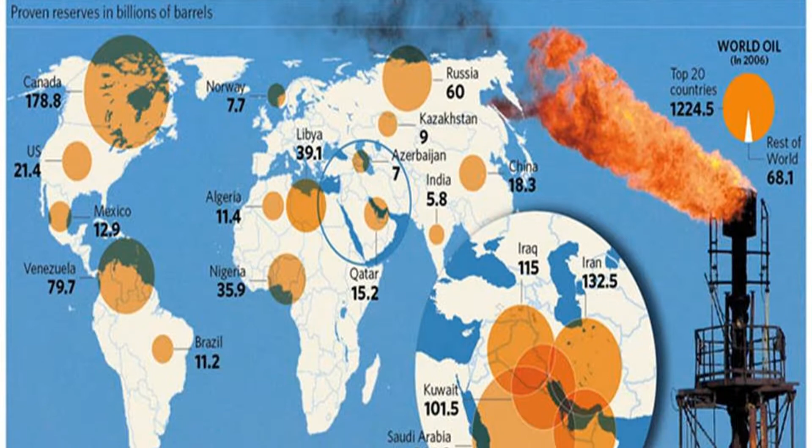And also, you can see here are the oil reserves around the globe. If you see where Cuba is, there's actually none around Cuba. So all the oil that is used in Cuba has to be imported from a different nation. So even though currently they don't have to pay for it because Venezuela is supplying it, you don't know what the future holds. And there's also a lot of carbon dioxide that's emitted from the transportation, and especially from its combustion.

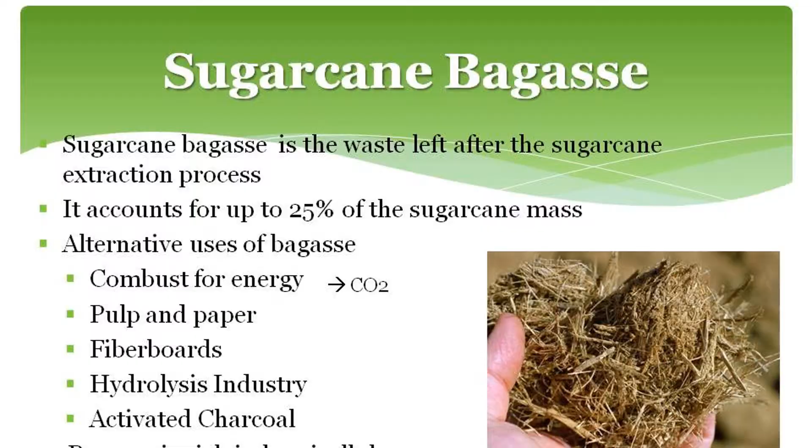As we all know now, Cuba's infrastructure is deteriorating and it needs significant upgrades. They need to break dependency from foreign nations, as well as come up with a reliable source of energy, and what better reliable source of energy than an available source of energy, such as sugarcane bagasse. So bagasse is the actual waste from the sugarcane production. It accounts for up to 25% of the whole sugarcane mass.

There are alternative uses for the bagasse. Mainly they combust it to supply energy at the refineries. The problem that we have from that is that there's carbon dioxide from its emission. They also use it in the hydrolysis industry and in activated charcoal.

One thing to note is that bagasse is very rich in hemicellulose, and that's very important for biological purposes. If you want to extract hydrogen from the bagasse, that's very good because it makes it a really good substrate for bacteria. And when you burn the bagasse at the refineries, the energy content from its combustion is 7.3 megajoules, and as I had mentioned earlier, hydrogen has 120.

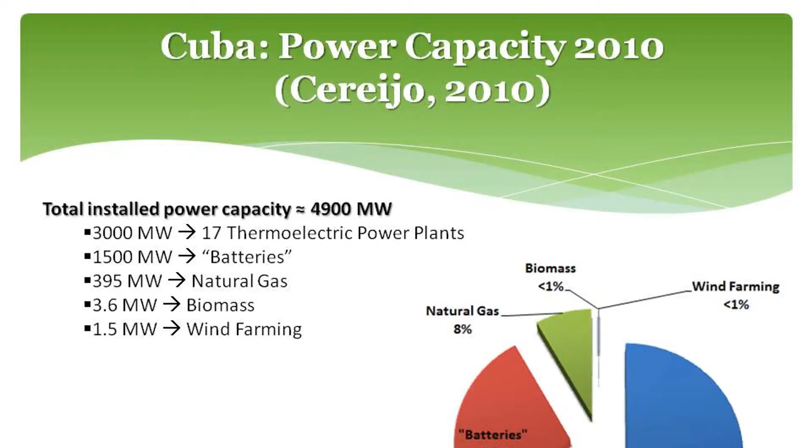As of 2010, thanks to Dr. Cereijo, sorry about the pronunciation, Cuba's total installed power capacity is currently 4,900 megawatts. Besides the inefficiencies, the majority comes from thermoelectric plants, and 31% comes from small generators, also known as batteries. 8% comes from natural gas, and a fraction of a percent comes from both biomass and wind farming. Of all this, 30 to 35% is lost due to its deteriorating infrastructure.

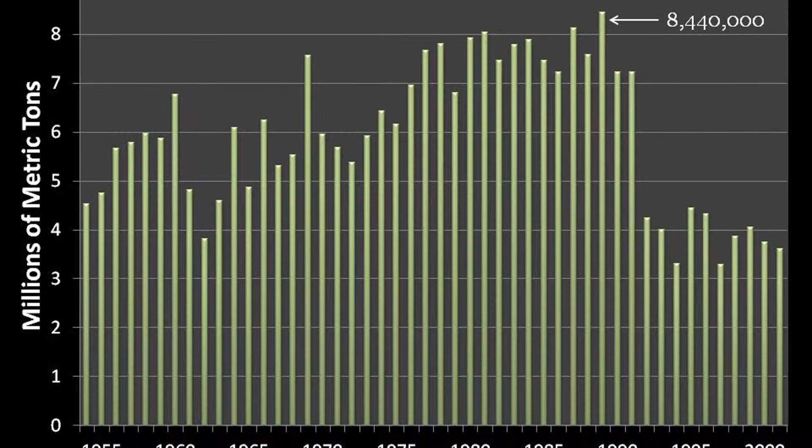Here are the sugar production trends from 1955 to 2002. I'll come back to this later. I just want to emphasize the maximum that happened in 1990. There were about 8.4 million metric tons of sugarcane produced. And I'll get back to that later.

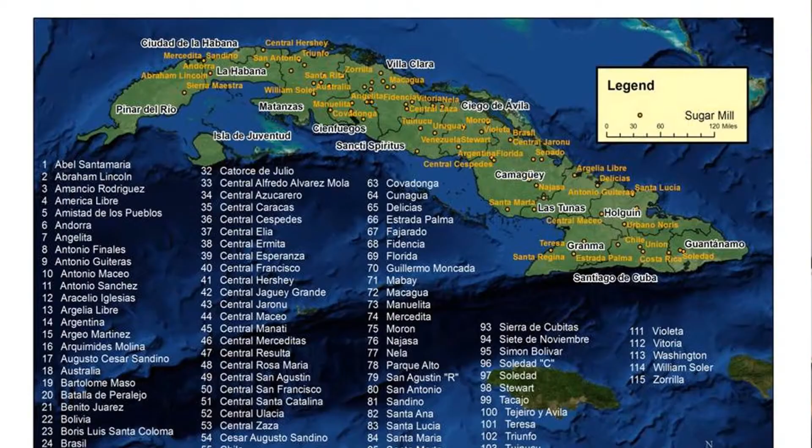Here is a GIS map that we developed of the sugarcane mills in the past decade. Currently only 26 remain. However, I would like to emphasize the uniform distribution throughout the island, and how transportation of energy from the sugarcane mills would be a lot more efficient.

So due to the need for a clean source of energy that utilizes the available resources in Cuba, we have looked at 3 different methods of producing hydrogen: biophotolysis, microbial fermentation, and bioelectrochemical systems.

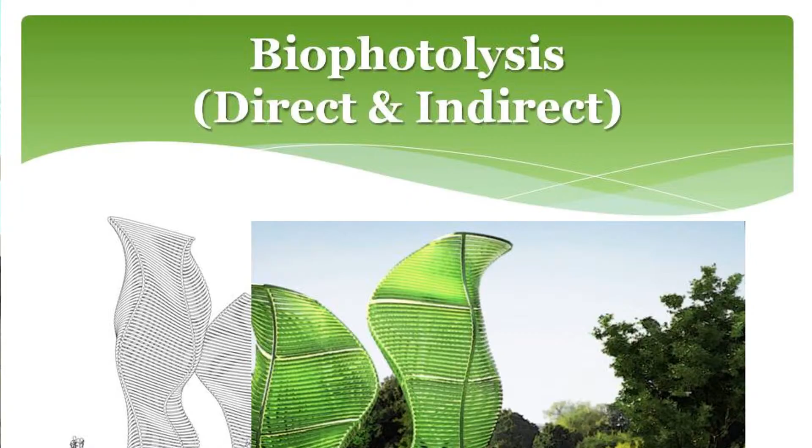The first one is biophotolysis, bio meaning life, photolysis, the splitting of molecules via bombardment of photons. It was first discovered in 1939, but it wasn't fully understood until the late 1990s. Here's a cool picture of a photobioreactor, and it's purely for aesthetic purposes. However, it is pretty cool to look at.

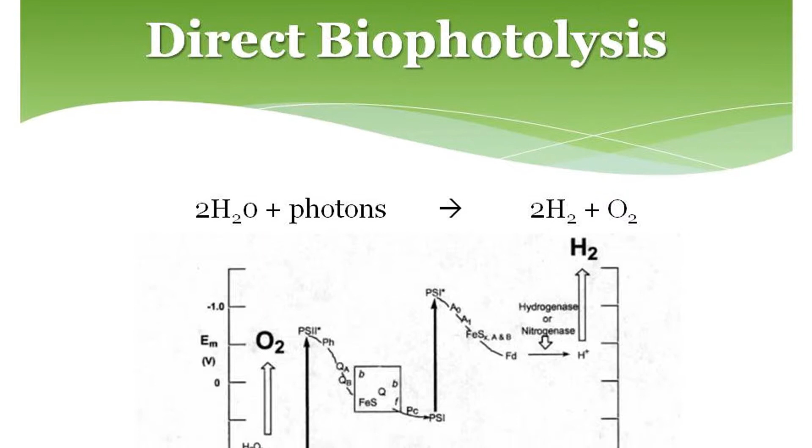The first type of biophotolysis is direct biophotolysis. Certain algae and bacteria contain certain enzymes that, if reduced, have the ability of producing hydrogen. The problem with direct biophotolysis is hydrogen and oxygen get produced simultaneously, making it less efficient at producing hydrogen. The solution to that is indirect biophotolysis.

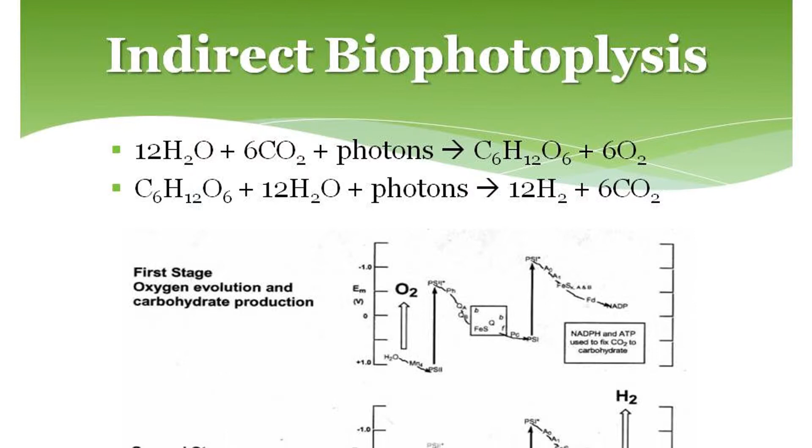Basically, they separate this indirect biophotolysis into just 2 steps. First, they produce carbohydrates, and in the first stage, they release the oxygen. And then in the second stage, they decompose the carbohydrates, and they produce hydrogen separately, producing up to 5 times more hydrogen than in direct biophotolysis.

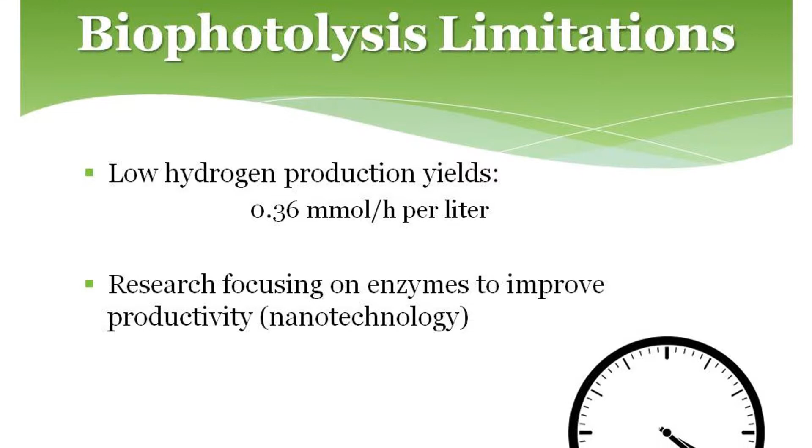The problem with biophotolysis is currently in research laboratories, only 0.36 millimoles an hour per liter of reactor have been achieved. But with nanotechnology and new innovations coming around, it's only a matter of time before this becomes utilized on a larger scale.

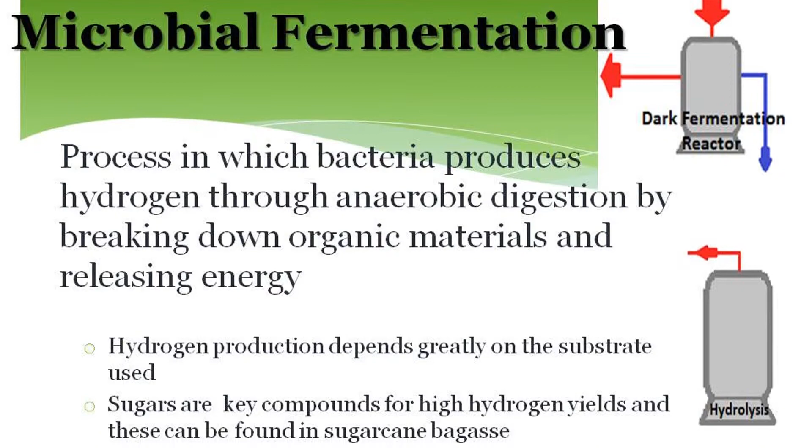Another method to extract hydrogen from waste, in this case the bagasse, is microbial fermentation. In microbial fermentation, you have the bacteria that would actually produce the hydrogen by breaking down the organic matter. The organic matter in microbial fermentation is called substrate. And as I mentioned earlier, bagasse is a really good substrate because it's so rich in hemicellulose and in sugars.

The fermentation that we looked at is actually dark fermentation because it's convenient as it occurs continuously in a reactor and it doesn't need the availability of light.

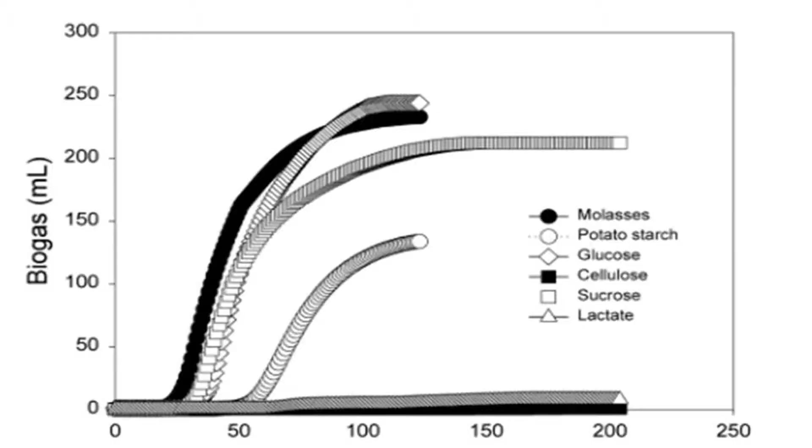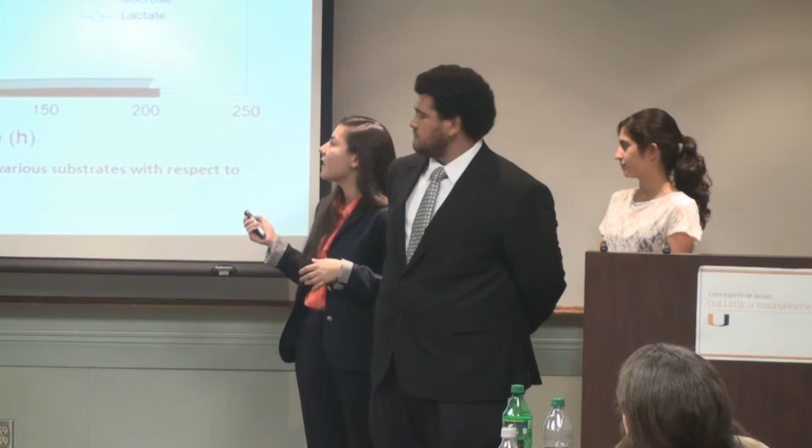Right here, it's actually different substrates that are used by bacteria to produce hydrogen. And at the very top, we have glucose, which is a component of the bagasse. And when you use glucose as a substrate for bacteria to ferment, you get the highest amount of hydrogen in the shortest amount of time. So it's very convenient to use.

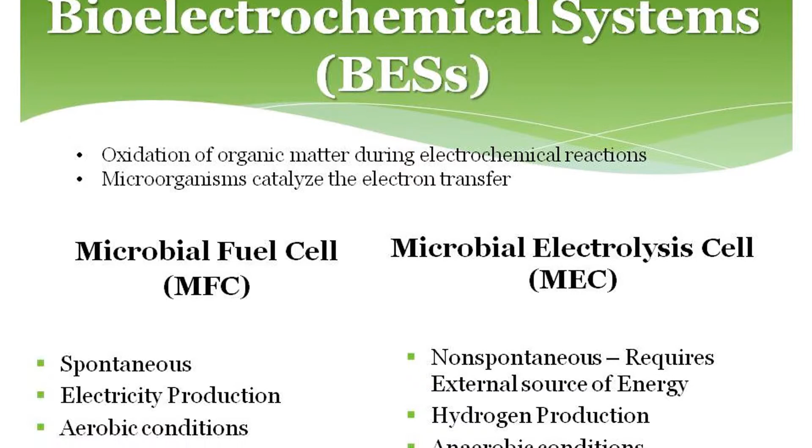Bioelectrochemical systems can be thought of as any electrochemical system where the bacteria serves as a catalyst for the oxidation of organic matter. There are 2 types of bioelectrochemical systems. There is the microbial fuel cell, where the reactions are spontaneous, so energy is produced spontaneously under aerobic conditions, and the microbial electrolysis cell, which derives from the microbial fuel cell.

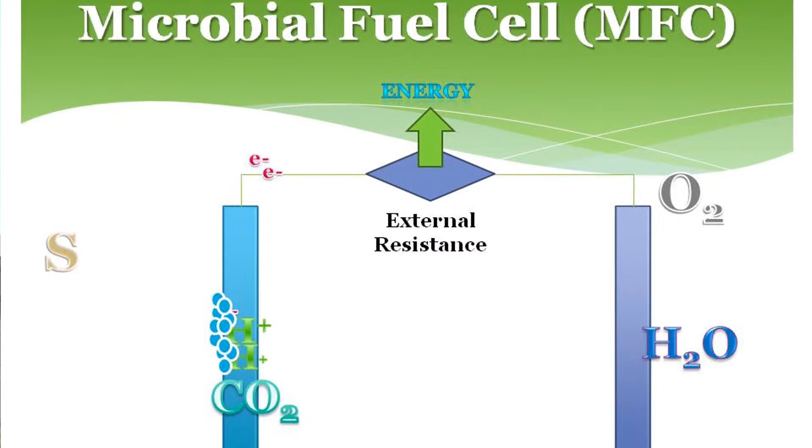In this case, the reactions are non-spontaneous, so they require an external source of energy, and hydrogen is produced rather than electricity, and it occurs under anaerobic conditions. This is an illustration of the reaction that occurs in the microbial fuel cell. First, the substrate is broken down by the bacteria into carbon dioxide, protons, and electrons.

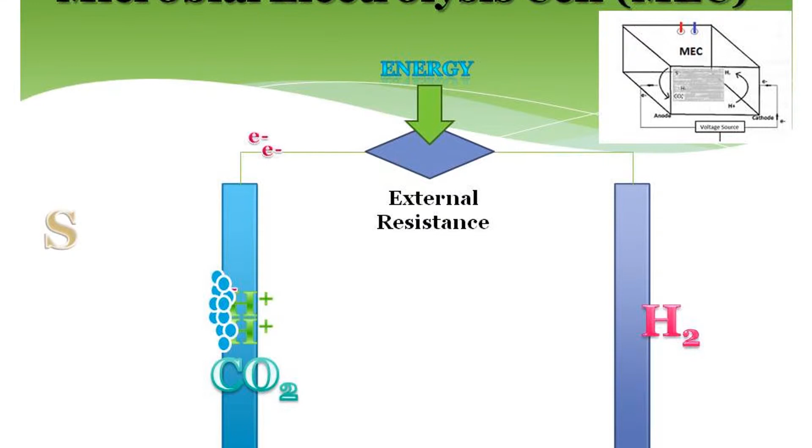Now, the microbial electrolysis cell, as I said, derives from the microbial fuel cell, so the reactions are similar. The substrate is broken down by the bacteria into carbon dioxide, protons, and electrons. The difference from the microbial fuel cell is that no oxygen is present at the cathode, so energy has to be supplied to the cell for the reactions to occur. And when energy is supplied, the protons and the electrons travel towards the cathode, react, and produce hydrogen.

There's been a lot of research that has studied the potential of using the MFC to power the MEC. Because as I already explained, the MFC produces electricity, so it has the potential to supply energy to the MEC, and then in this manner produce hydrogen without an external source of energy.

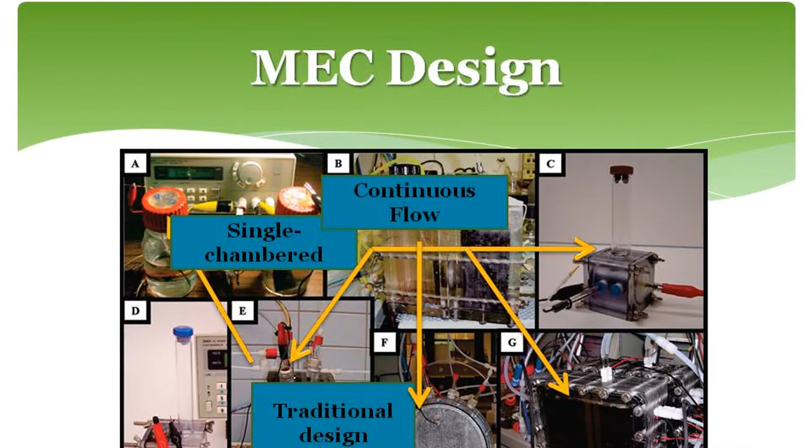These are different experimental microbial electrolysis cell designs. The first one is the traditional design that was used to just prove the concept behind the electrolysis process. It consists of two bottles connected by a tube and a cation exchange membrane that facilitates the movement of protons from the bioanode to the cathode.

These are continuous flow reactors that produce hydrogen continuously, so it doesn't accumulate. And this one is the single-chambered microbial electrolysis cell, which lacks a membrane, because there's been research that shows that there is energy loss involved in the membrane. So the absence of the membrane can produce more hydrogen.

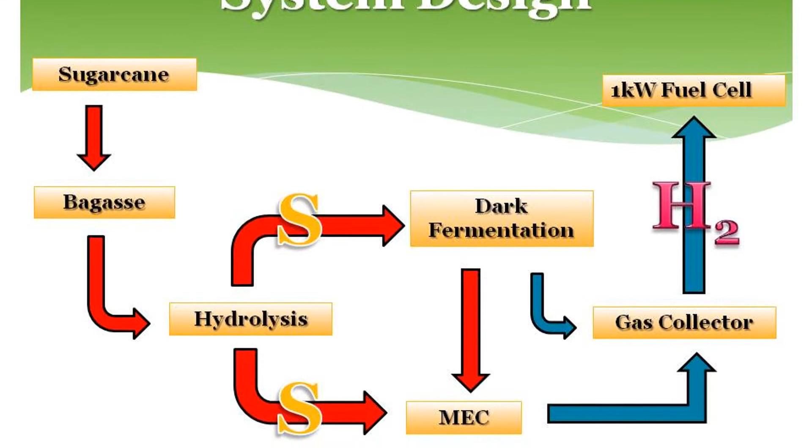So we've talked about three processes of producing biohydrogen: biophotolysis, which could use solar energy to produce hydrogen, and dark fermentation, and the microbial electrolysis cell that can use organic matter to produce hydrogen. Out of these three processes, dark fermentation proves to produce the highest yield of hydrogen. So we propose this integrated design that combines dark fermentation and the microbial electrolysis cell to even maximize hydrogen yield.

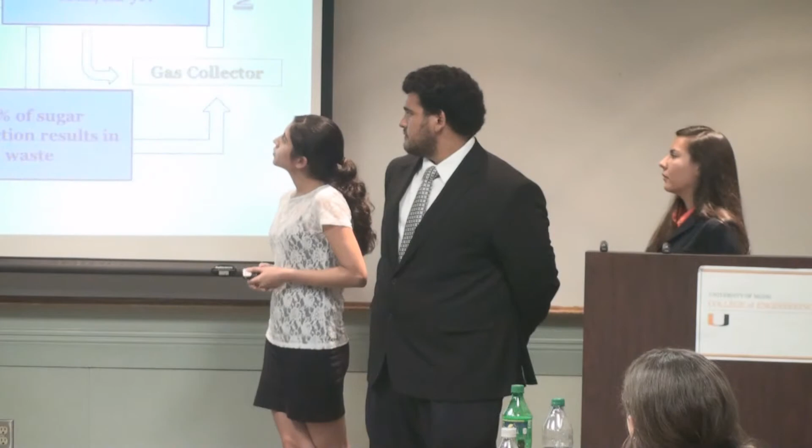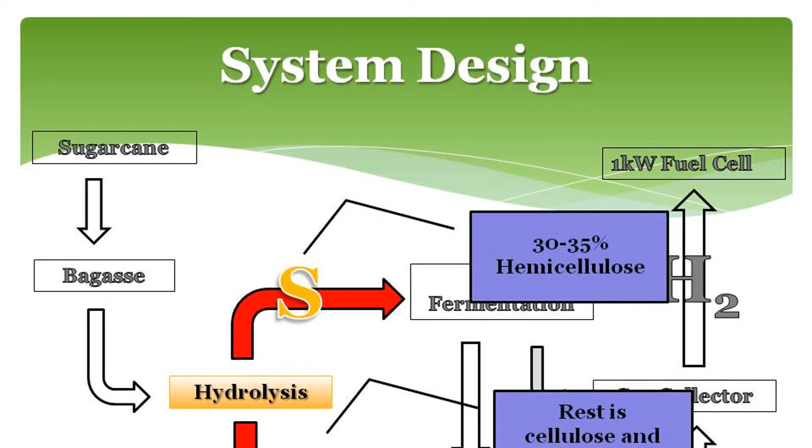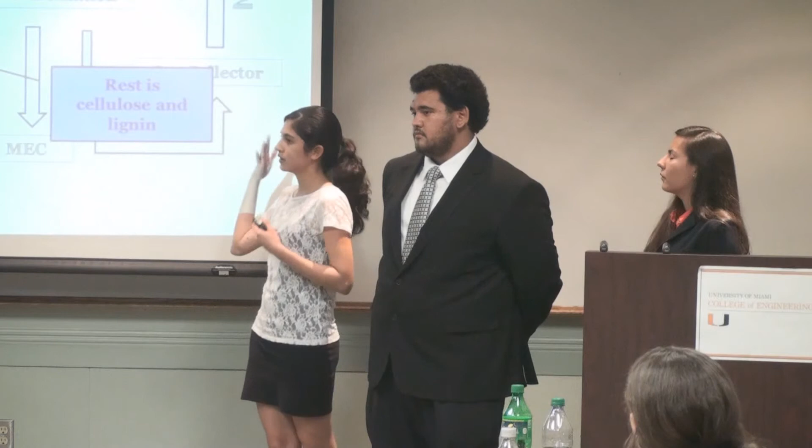So we assume that sugarcane production in Cuba is approximately 50 tons per hectare per year. 25% of this sugarcane production results in waste, which is the sugarcane bagasse. The sugarcane bagasse now undergoes hydrolysis, where it's going to be broken down into 30 to 35% hemicellulose, and the rest is cellulose and lignin. As Maggie went over the dark fermentation process, hemicellulose would go through the dark fermentation reactor, and the rest that is cellulose and lignin would go through the MEC.

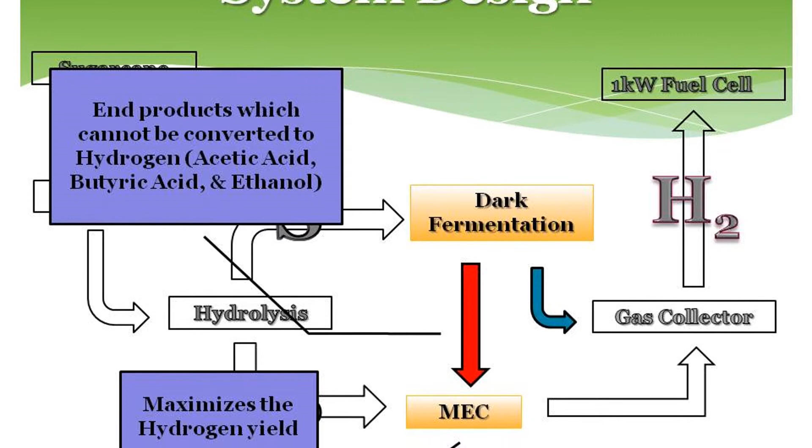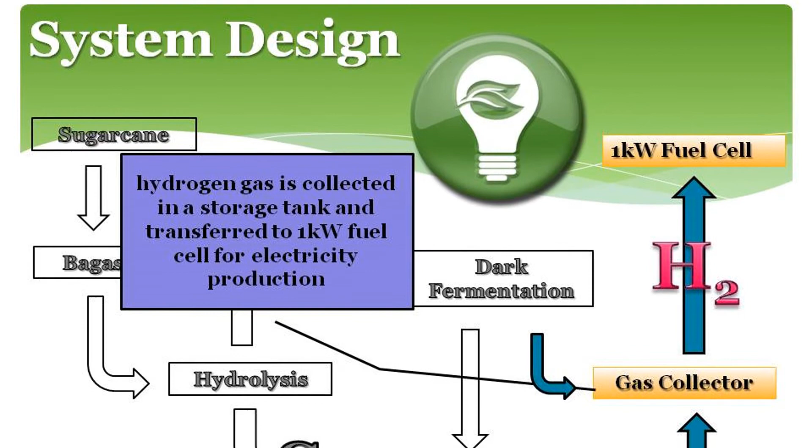And so during dark fermentation, there are byproducts that have the potential to produce even more hydrogen, but that can't be broken down by the bacteria. So the dark fermentation effluent would be transferred to the microbial electrolysis cell to even maximize the hydrogen yield. And the hydrogen produced from these two processes can be collected and transferred to a 1 kilowatt fuel cell for energy production.

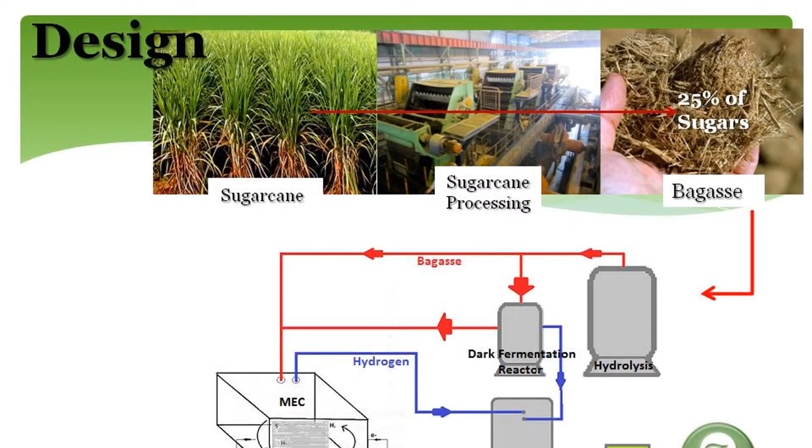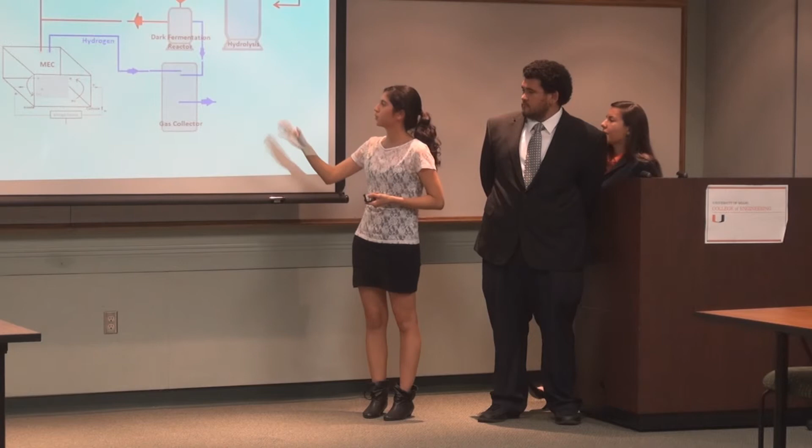And just to recap, 25% of the sugarcane production is sugarcane bagasse. In our design, it is broken down during the process of hydrolysis into hemicellulose and solid matter. The hemicellulose goes through the dark fermentation, solid matter would go through the MEC, and any remaining products in the dark fermentation process would also be transferred to the MEC to extract more hydrogen. And the hydrogen is collected from both reactors, transferred to a fuel cell, to produce electricity.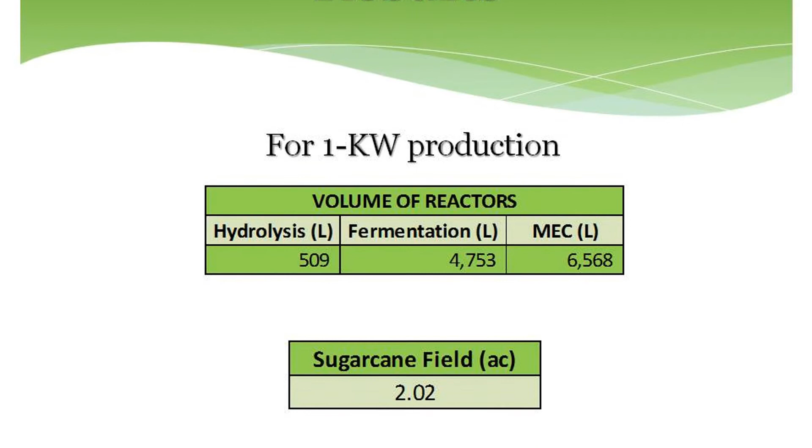And looking into literature, we've collected data to estimate the volume of the reactors that would be required in our design. For hydrolysis, it would be about 500 liters. For fermentation, about 4,700 liters, and for the microbial electrolysis cell, it would be about 6,500. And about 2 acres would be required for production of 1 kilowatt, which is slightly less than what a modest home would require, which is 1.3 kilowatts.

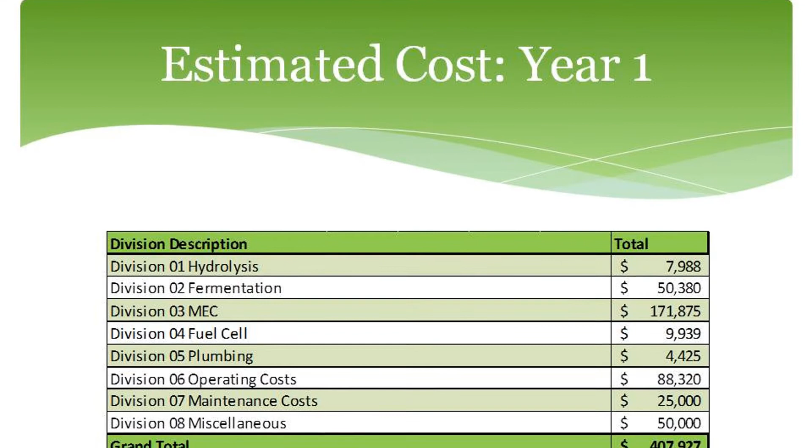Here's the cost analysis of our pilot design, including the MEC and the fermentation and the hydrolysis reactors, also including the maintenance and operational costs of one engineer and two technicians. So basically, it will cost about $400,000 for just 1 kilowatt. However, this is just to go further, because all these studies are done on a small scale. So we want to see on a larger scale what we can do, and if production rates are better, we can hopefully implement it on an even larger scale.

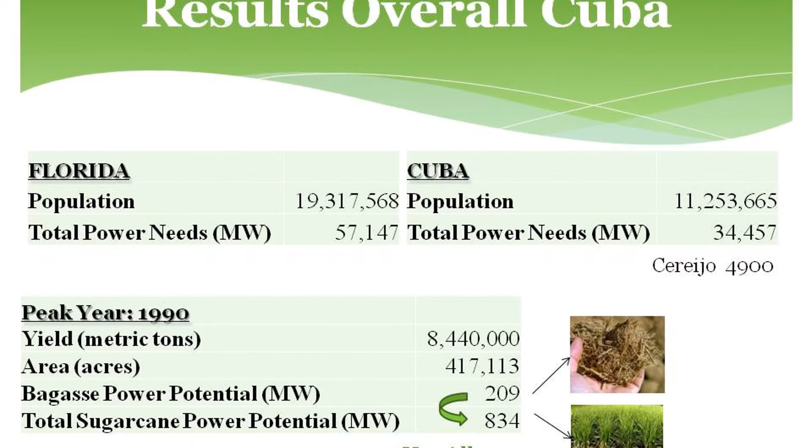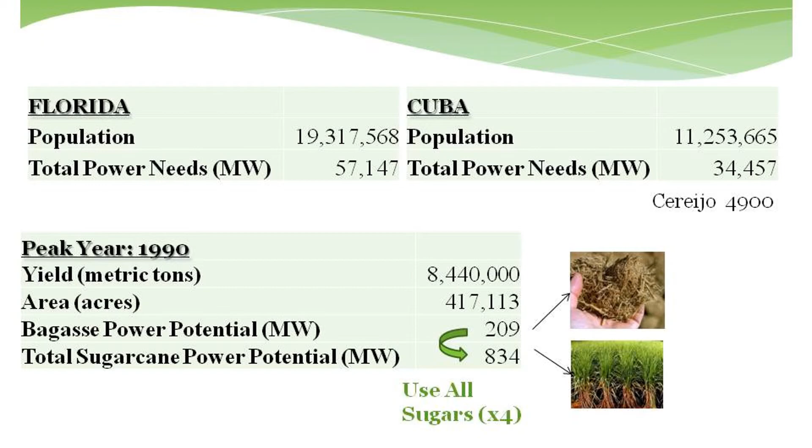So the overall results, I would like to just give everybody a perspective. I know Cuba's a developing country, Florida is part of a developed nation. But by relating Florida's population and total power needs to Cuba's population, we can see that Cuba is drastically under-powered from the 4,900, and in relation to Florida, it's about 35,000. So back to 1990 when they had their peak sugarcane production, and most recent peak sugarcane production.

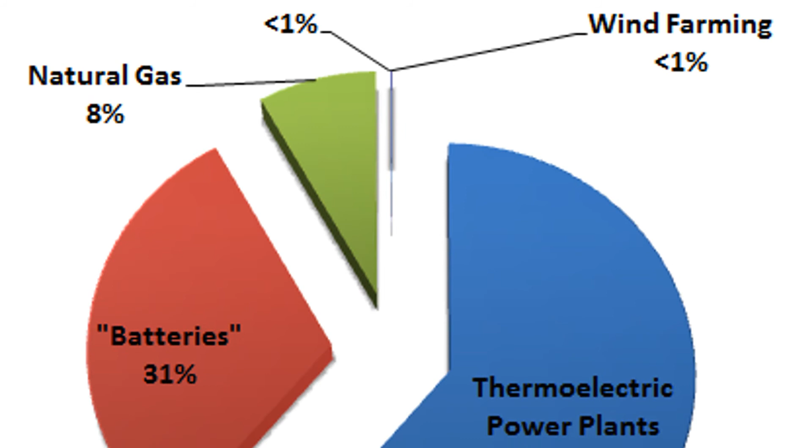If we were to use this technology to supply energy, and if we were just to use the bagasse alone, we could potentially give Cuba about 209 megawatts. And if we were to use all of the sugarcane, then we pretty much multiply by 4 and we can get about 834 megawatts of installed generating capacity. That would increase Cuba's power infrastructure by about 15%.

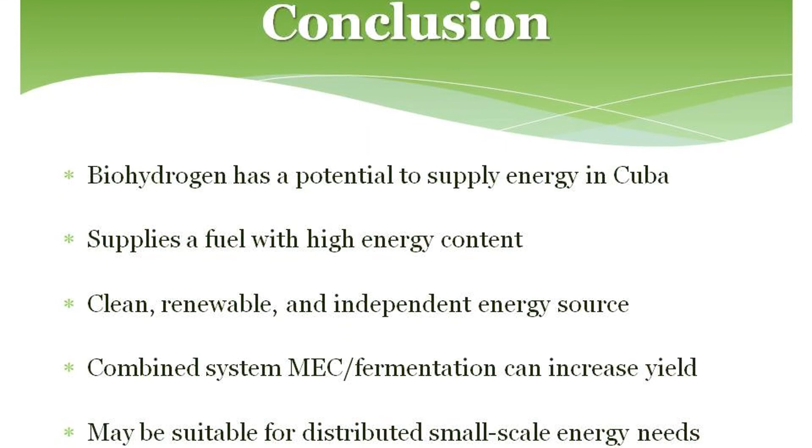And conclusion. Yeah. So as I mentioned earlier, biohydrogen is a clean energy source. It has potential to supply Cuba, and it will break down dependency on foreign nations, even if it's just a little bit. Combined systems such as the one we mentioned, or possibly others, are good because they could maximize the amount of hydrogen that's yielded.

And our pilot scale is mainly suitable for a small scale energy system. As it was mentioned earlier, the areas that need the most help are not the big cities, because that's where their main focus is. It's probably rural areas that are more neglected by the government. That's where this pilot scale would probably be optimal.